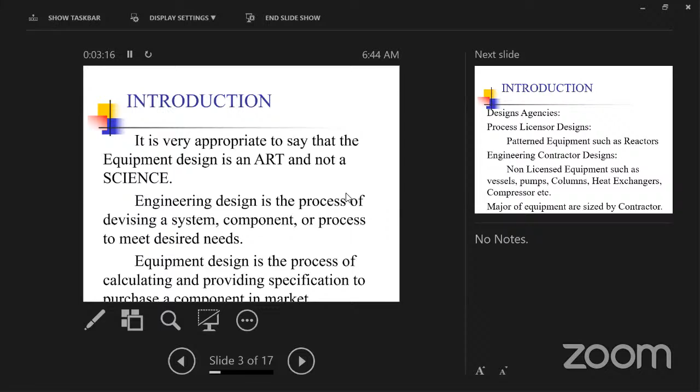Normally equipment designs are done by three agencies. One is the process licensor - companies like UOP and Axens, they are big shots. They design the process scheme. If we read our case studies, we have many processes to produce ammonia, and many processes to produce other chemicals. So they are the licensors.

They take care of patented designs such as reactors. They have a pilot plant, they do pilot tests, and they have proprietary catalysts. So these equipments, only the licensor can design. If we are a process engineer working with the licensor, yes, we can do a reactor, and it's our guarantee. Most process engineering for such equipment is done by licensors, and they finalize the performance.

The engineering contractor designs non-licensed equipment, which is open art. We can do vessels, pumps, columns, heat exchangers, compressors - the majority of equipment is sized by contractors. The licensor only does the proprietary items.

Other designs are vendor-supplied items, such as distillation column trays and tray arrangements - how many bubble caps we need - these are all done by column tray vendors, not by us. Other auxiliary systems like pump seals, compressor seals, ejectors, and steam traps are also vendor-supplied items which we cannot do, and we don't want to do either - these are all proprietary auxiliary items.

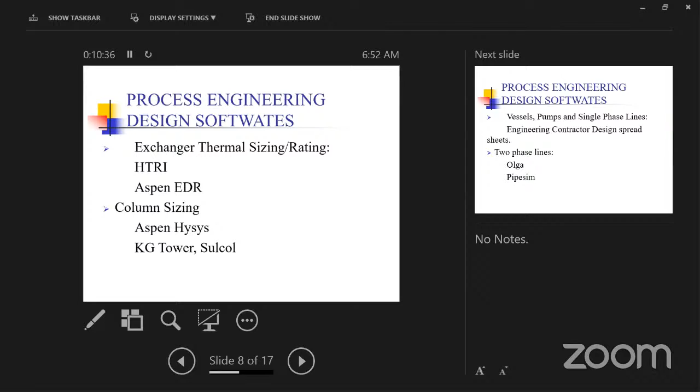Other major equipments are vessels, pumps, and we need to do single phase line sizing. These line sizes are mostly done by engineering contractors using design spreadsheets. Every engineering contractor has design spreadsheets, it's Excel, it's patented Excels. People use it and we can size it, no problem.

In a process plant, the costly items are reactor, columns, heat exchangers, vessels, pumps, then lines. So people will focus on lines. If you are able to reduce the line size, then we are providing an economical plant. So people give importance to the line sizes also.

And very interesting, we have two-phase lines. It's a really nice field. There are engineers called flow assurance engineers, you would have heard somewhere. Flow assurance engineering is a hi-fi job and hi-fi nature also. We can predict how a single phase will behave, but it's not easy to predict how the two phase will behave, that too in kilometers of pipeline.

The recent project worldwide speaking is the China project. They were going to make some pipeline projects between Europe to China, Russia to China, Arctic continent to China. So these pipelines are very important compared to vessels. When we make a 30-inch pipeline for a kilometer, it will be bigger than a process vessel. And the problem is these pipelines will cross domestic areas, commercial areas, forests, rivers. So when all these territories are involved, it's a very nice design to get into.

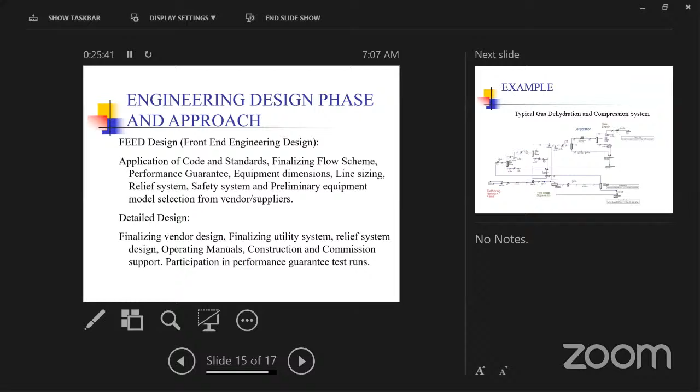I will take one typical gas dehydration and compression system as an example. I will take you to one of the very good software, HYSYS. I think St. Peter's has some HYSYS software. I recommend you people go and get practiced and write in your resume that you are familiarized with HYSYS.

So this is one of the very good, nice software you are seeing here. I'm having the latest version here. So this is one of the scheme.

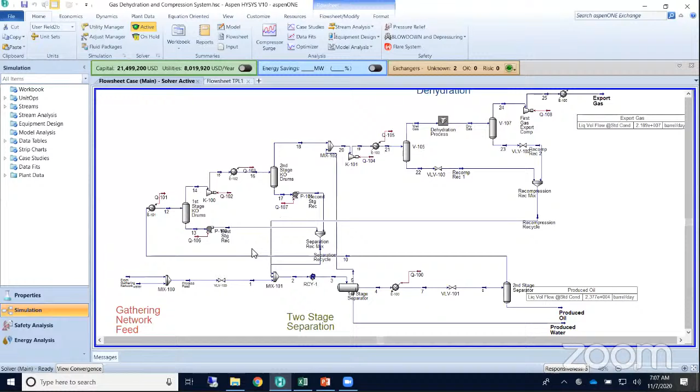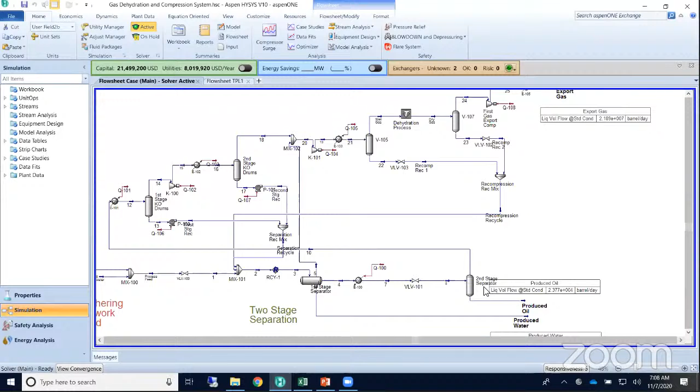So we have a gas production from the gathering. Before that, we will have a lot of wells, pipelines, and it comes to our process plant. This is a process plant, one of the gas compression and dehydration. I'm trying to fit here. So the upstream is another facility where there are wells and kilometers of pipeline. This is a process plant.

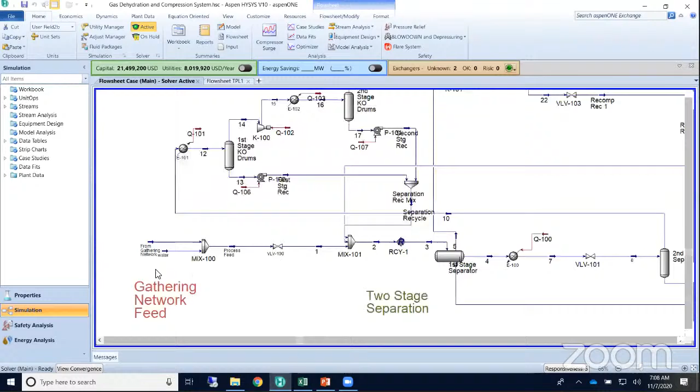Here we are gathering all the production fluids. I can say it's a production, it will have water, I can show you. So this is the stream. In this we have a vapor, we have a liquid, and we have aqueous phase, water. So when we do chemical engineering, we may have these three fluids.

How do we know the density of the mixed fluid? How do we know the viscosity of the mixed fluid? This software has a full backup and data. These are reliable softwares. If we do design in this one and implement, it will perform. It has pilot plant data also.

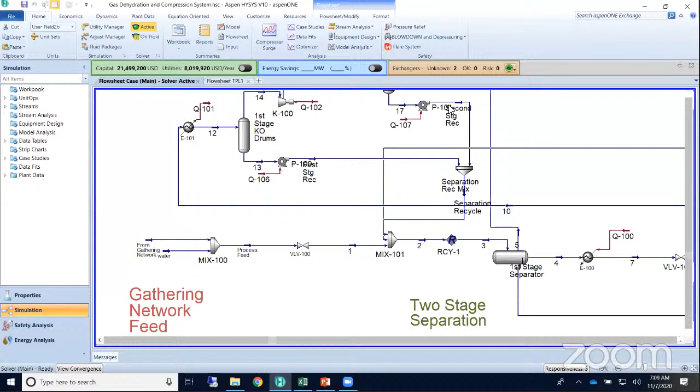Maybe I can give some introduction about this software. So this is a simulation and modeling software. We can simulate any fluid here, but this software has some limitations.

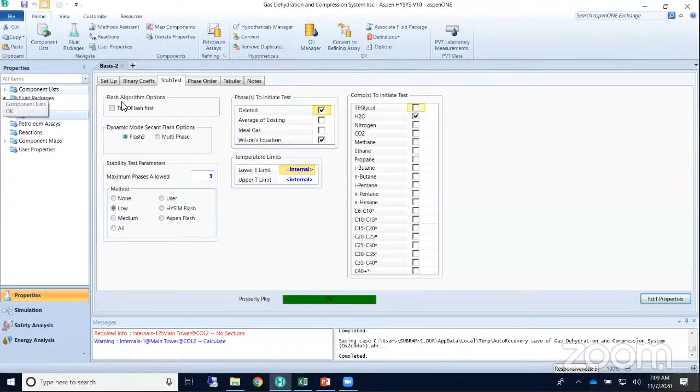Okay, I will start from the first. Whenever we start some equipment design, this software we start with HYSYS. We need to make a process scheme, that is called process flow diagram, and make heat and material balance of the total production plant.

I will open you one. So in this case, I want to start a plant modeling. I will open a new one. Okay, so once I start here, this is a new environment.

First, simply I will take some water. I wanted to boil it. How much heat I need to provide, I need to calculate. When we do by theory, it may take an hour, but when we do it with this software, it can happen in minutes. I will tell you.

Once we open, it will ask what is the chemical component we have. If you see here, from methane, all chemicals are here, with the properties. It has a full set of properties.

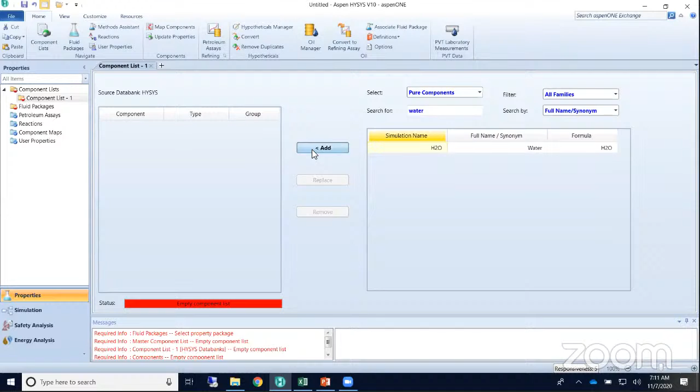Okay, let me select an easier one, water. Then it will ask for the thermodynamics we use. You can appreciate what the software is doing here. You see, we have packages. We say Peng-Robinson, which we study in college. SRK. All the equations are inbuilt here.

Some equations are not in the software. As I say, this software is not very good for electrolytes, but it will still do it. You see, glycol is another electrolyte, but we don't choose this in the software. We have a specific software for that.

So again, now I have chosen water. For water, Peng-Robinson is not a good tool. We need to have a steam package. So here there is a steam calculation package. If I mistakenly select this one...

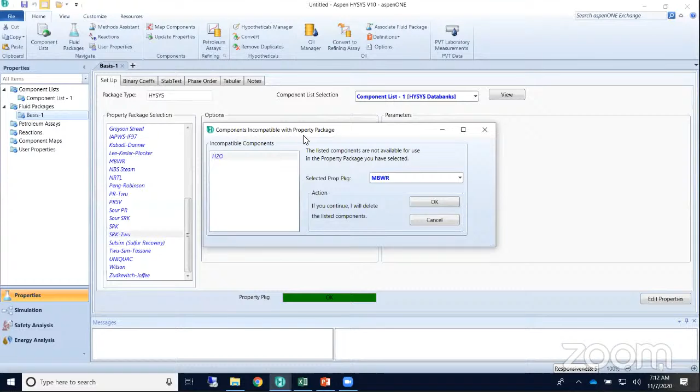Okay, so these are compatible, so it is saying green. But if I say something wrong, yeah, this is incompatible. So this software will direct you if you do a very big blunder. So I can choose ASME Steam here.

Then I go to simulation. Now I have chosen component and thermodynamic package. Again, if ASME Steam I have chosen, it is not asking any properties. But if I select Peng-Robinson, it will ask again, what enthalpy equation I have to use, what density equation I have to use, what modified critical pressure, critical temperature estimate method, and what viscosity estimation method.

And what method to estimate the thermal conductivity? This thermal conductivity plays a role in heat exchanger sizing. And what is the surface tension method? Surface tension plays a significant role in separation.

Okay, so this area is really, if somebody is good or wants to learn thermodynamics, practice this software. This is full of equations. I have not explored much because we use oil and gas chemicals. Sometimes when we go to fertilizer, they have very recently updated packages for ammonia. It behaves differently when compared to other oil and gas chemicals.

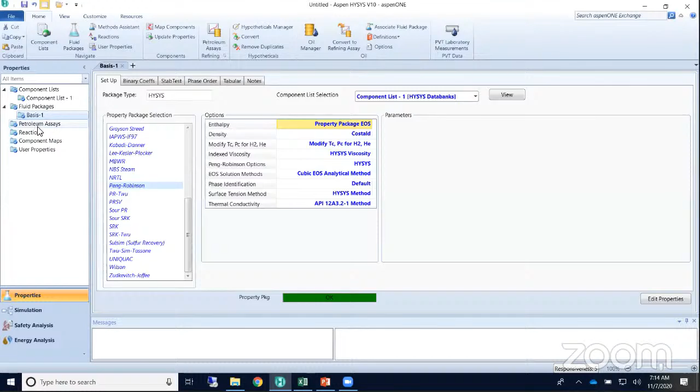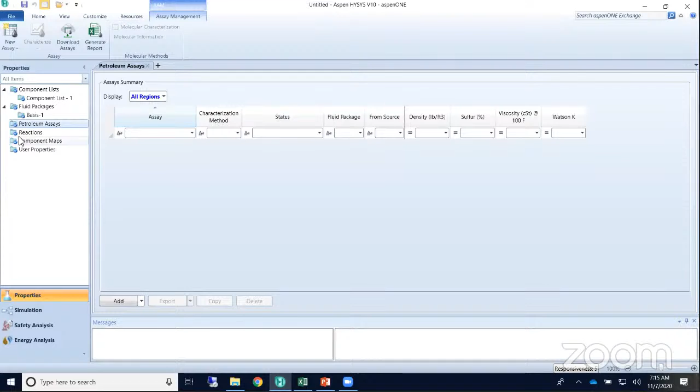When we go to crude oil, I don't want to cover it, it's a big topic. Crude oil is not a single component, it's an array. Based on the boiling point, the composition varies. We can model crude oil here, but I'm not covering it. If you go through here, you would have read the Watson K factor in theory books. It has significance and the provisions are here. The software covers all of this.

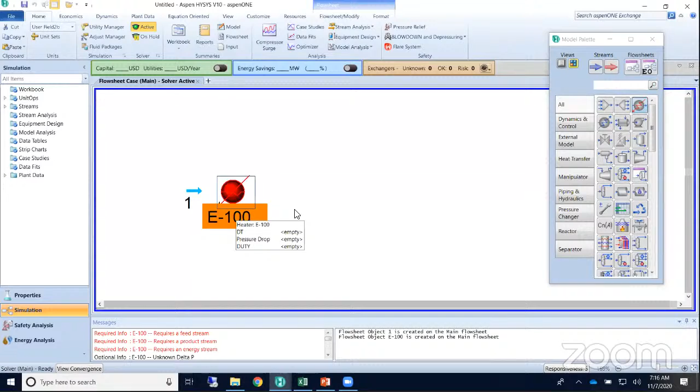These are some points on the software. When we go into a simulation, our modeling environment has started. So I want to heat up the water and make 1% boiling. This is water and I want to heat it. These are the software navigations you can learn by referring to tutorials.

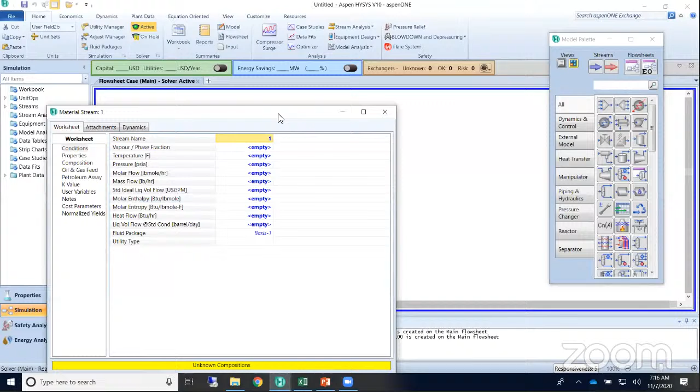You can check in Google. I'm just giving an eye-opening on this software. Once you open this, it will ask - the software doesn't know what this is, they have to tell it. This is composition. Here it's water, so I give mole fraction 1.

If you have a real composition of oil or water, we can provide it. Then it asks for the initial conditions we need to provide - what is the temperature here, what is the pressure here. So I give 60 degrees.

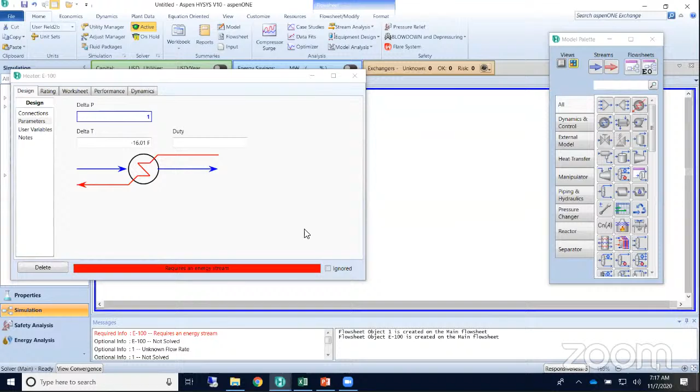So in the outlet, I need to have 10% vaporization. And pressure loss - this exchanger is a mechanical component which will create a pressure loss, so I'm giving 1 PSI. I think this needs an energy heating stream also.

Now we need to define what the flow is. The software needs the initial conditions, so we have provided it's water and it's 140-degree hot water. In order to saturate water, we need to provide a vapor fraction, so then we will give 1000 kg.

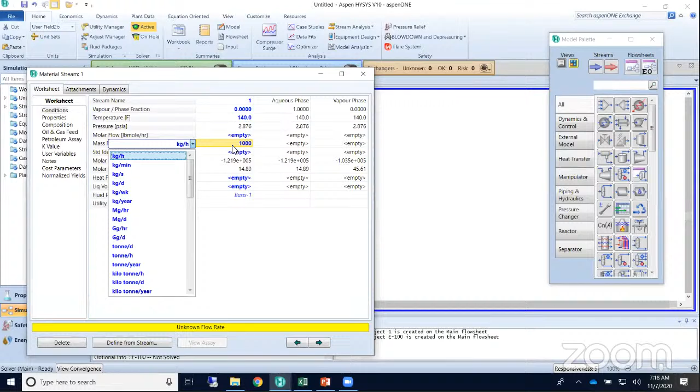And this software has all units. If you read this now, it has full properties - we don't need to go to a Mollier chart. It has full properties. The water molecular weight we know. Now what is the density of the component? What is the volumetric flow? What is the viscosity?

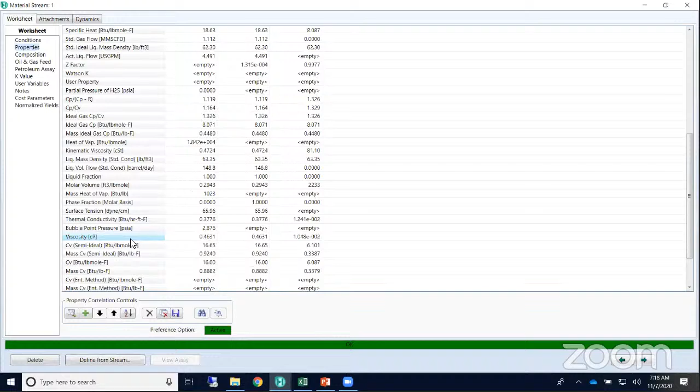Full nature - this is the full chemical and physical property of a stream, so we can get it from here. No need to go anywhere, don't need to check anything in Perry's or a Mollier chart. Simpler, we can get it. Even for water, we'd normally need to go to a Mollier chart, refer to graphs or tables. Here, nothing - it will give a straight away answer. Whenever we change something, it gives a straight away answer.

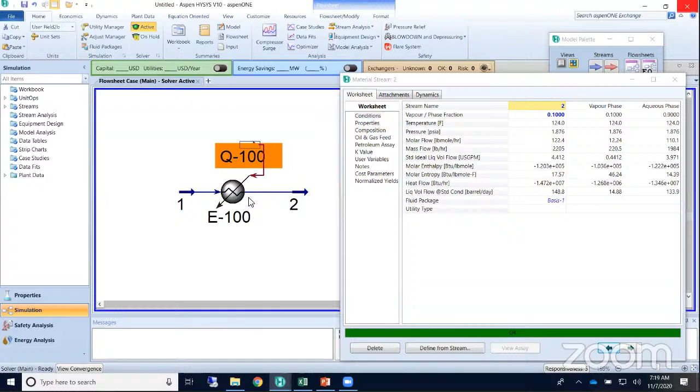And now it has estimated what the duty is - this is the duty of the heat exchanger. To vaporize 0.1 vapor fraction of water, I need this much kilowatts. We can change the unit also, so we can represent it as BTU. Normally MMBTU will be used to quantify the exchanger - 0.2 million BTU power.

So these are some examples I'm giving on this software. The software has many modules - we can do energy analysis, we can do safety analysis, we can do dynamics here.

We have blowdown and depressurization. This is one of the very good engineering applications where you can apply isobaric, isochoric processes. Depressurization is one of the isochoric processes - the volume of the process remains the same, but we change the pressure from high pressure to flare pressure. So this is a very good tool.

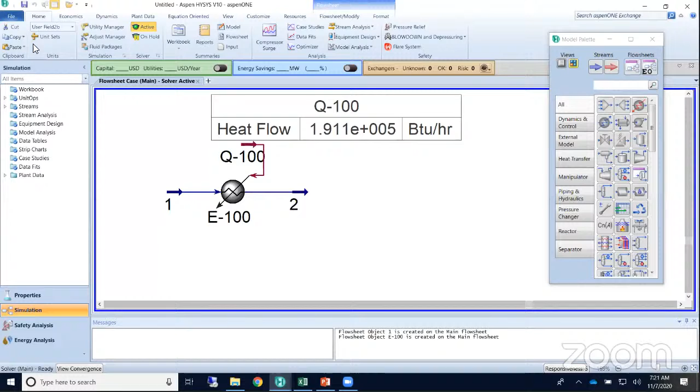But I recommend you guys learn how to model a smaller stream first - how to open this, how to set up the simulation environment. Then you can build complex processes. This is about this HYSYS software. I'll go to our simulation.

So in this case, we have made some set of process scheme. We need to size now the major equipments. First they do a compressor - this is a long lead item. Columns they do, then vessels, then line size, then pump - like this it will get progressed. Heat exchanger also they will do it along with the vessels. So the scheme is finalized here.

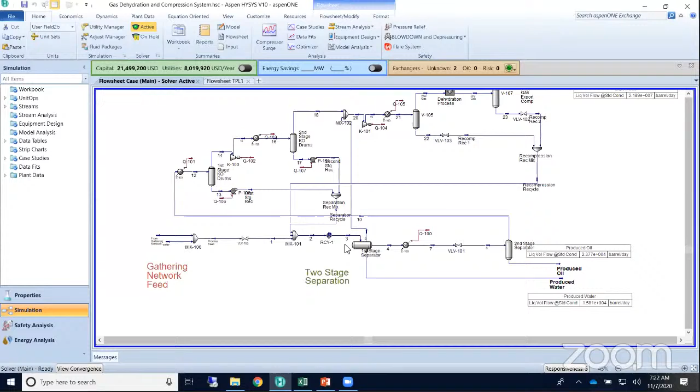I don't want to go into the simulation. It's another big topic - modeling and making a conceptual design, whether I need a compressor or not, whether I need a heat exchanger or not, whether I need a vessel or not. These are all again conceptual. I would like to cover only a few equipment sizing.

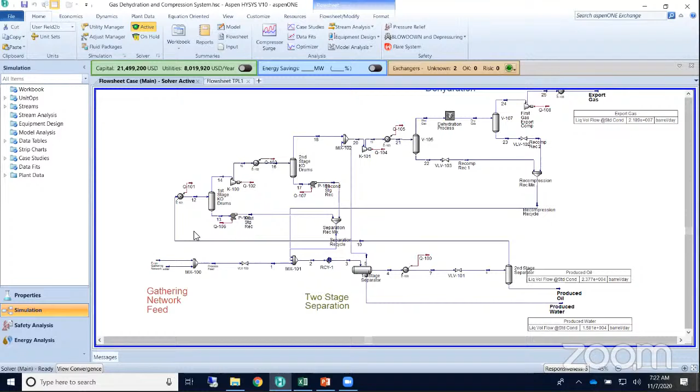Okay, so maybe we will be running out of time, but I will cover some equipments. Let's start with the line size.

So I want to size what is the line size. There is an equation, Darcy's equation - it's universal, it's not going to change. Instead of going into Excel, we can do it here. There is a pipeline segment - do this one.

So I want to size what will be the pipe size for the process feed stream, and this is a two-phase stream.

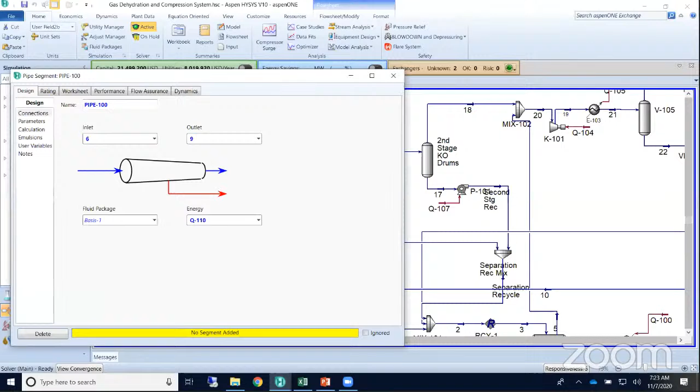So from the plot plan - a drawing in which we see where the equipments are located and what will be the relative elevations and relative locations - I assume this pipe segment between the inlet, from this inlet to this valve, we have a pressure loss. From this one to this, I find it's 100 meters. So I installed a pipe segment here. I go to rating and add a segment. This is a pipe, equivalent length is 100 meters. And then elevation change, I don't provide now.

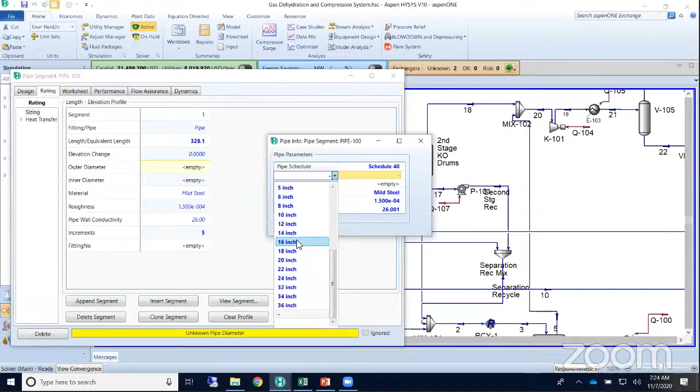Okay, so in preliminary sizing we need to select what will be the line size. We can, by engineering judgment, know this much flow is going, so it could be a size like that. So we select some 20 or 16 inch, and it will ask whether the heat transfer is in the exchange in the pipe or not. Normally the process plant pipes are insulated, here no insulation.

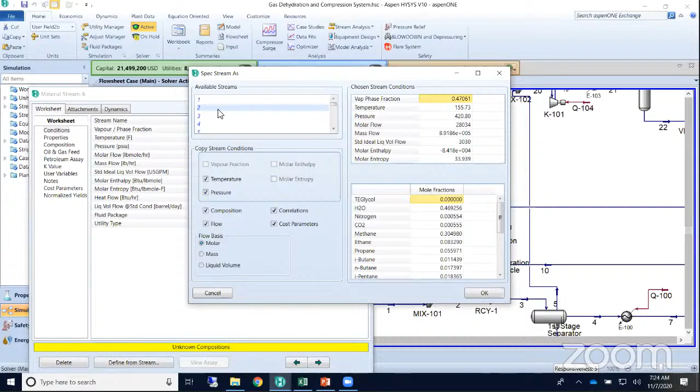Let us give this stream - we will copy this stream to 6. Open this, go to process feed. It's done, now the line size is done. Whenever we see blue and this gray, it's done, otherwise it will show red. So let us see what size we got here. So we have given a 16-inch line, and then it's OD - ID will be 15-inch. We are seeing here, okay.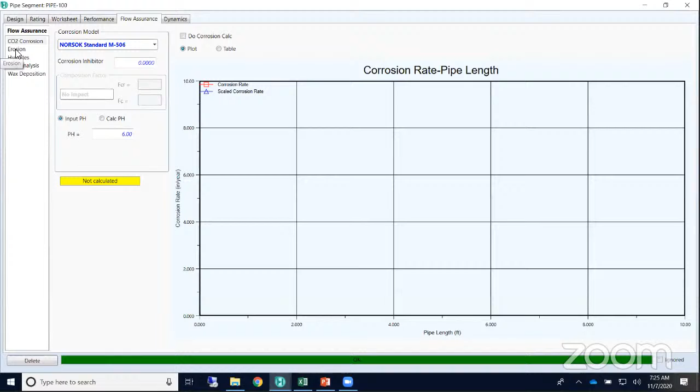Again, this has a provision for flow assurance - we can verify is there any corrosion, erosion, hydrates. I think you read the two-phase for slug also. Is there any wax deposit? Everything it will find. Before going, I want to show the results here.

I want to see velocity. Normally we use velocity, so liquid velocity we will select. Each segment we can find - let's make it this one. Okay, inlet velocity, vapor velocity, pressure loss.

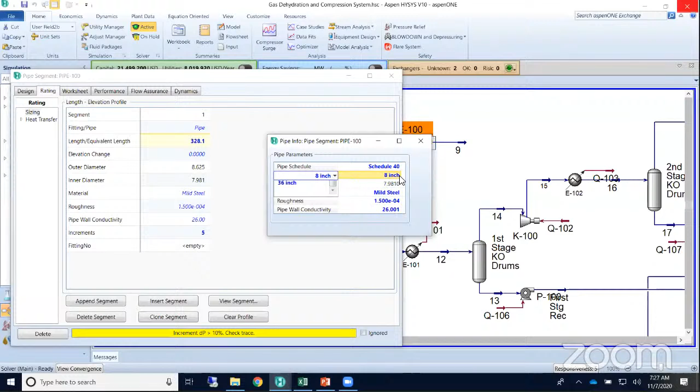Okay, this is fine. In fact 16 inch is very big for this - the velocity is very low and pressure loss is not much, so we can reduce this one. Yeah, again the pressure loss is a little big, so we need to increase. It's an iterative process, okay.

So the inlet vapor velocity is 87 feet, is fine. Liquid velocity 5 is fine. We have a set of rules here - maybe I can show some.

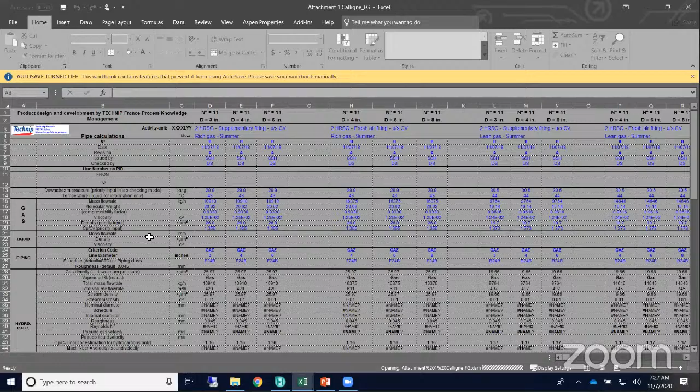So these are the criterias. Okay, we have to select - is it a gas? Yes. Then is it compressor suction? Or again gas is having a general gas, compressor discharge. So we need to filter it one by one. I say, for example, gas, and it's gas suction, compressor suction. Then what is the criteria I have? I don't have any criteria on pressure, inlet pressure, and I don't have any criteria on velocity, and I have only a criteria on rho v square. Rho v square is a loss - it's a noise kind of vibration, and we have a pressure loss. So per kilometer we should not lose 0.7.

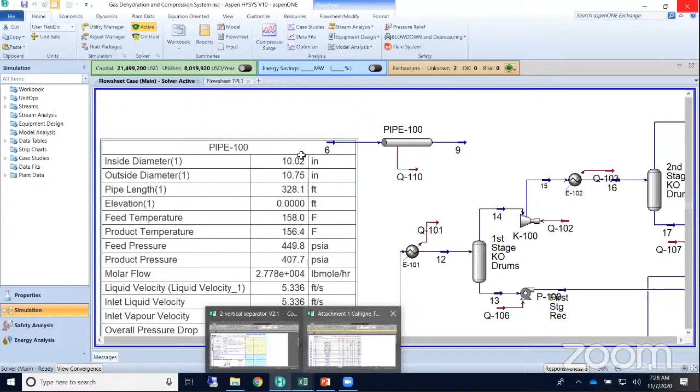So we will iterate the line sizes here to meet this requirement. As well as we have direct spreadsheets - this is a detailed engineering Excel. I don't want to go inside. If we copy the inlet and outlet conditions of these properties, we need to provide the line sizing properties - flow, molecular weight, compressibility, viscosity, density, and Cp by Cv. If we provide this, these are used in Darcy's equation. Same we need to provide here. Then it will say we can directly iterate here - 3 inch. This input again 3 inch, 4 inch, 6 inch.

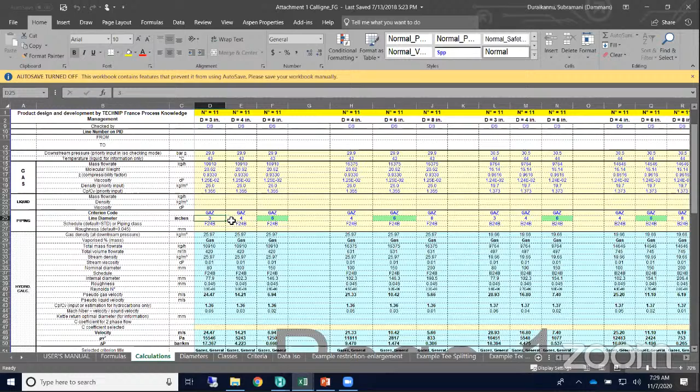We will verify for 3 sizes, and from that optimum we will select. The same I was doing here in HYSYS. So we need to meet this criteria. We will change the line size and then finalize it for this line, and then we can go to a drum.

The purpose of any drum is to separate vapor and liquid and hold the liquid for some time, to manage any process upset. For example, let's take this compressor. The compressor inlet knockout drum in our scheme is to separate any liquid from the vapor, and only vapor will be going to the compressor. If there is any liquid going to a compressor, it will damage it, so we need to remove the liquid.

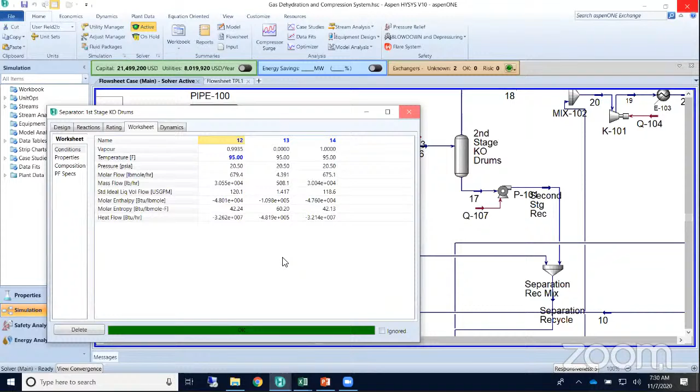I find small liquids are here, so we can size this one. The system is converged. In HYSYS itself there are methods, preliminary sizing we can do. So the system is converged, now I need to do a preliminary sizing. I open and put this as a vertical vessel, and the cylinder, the dish they are asking - normally it's hemispherical. So now if I say quick size, it has done it.

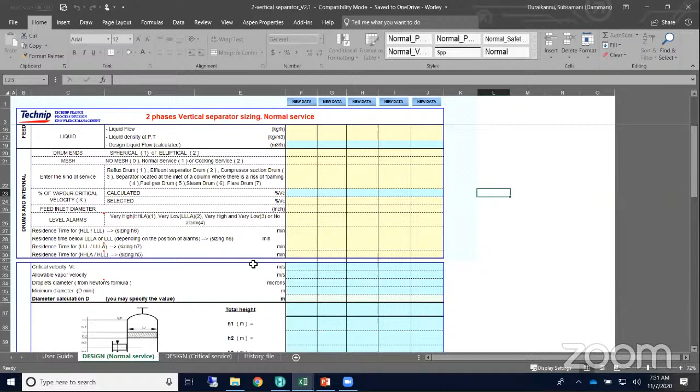But the formula behind this one, I will explain you in Excel. The formula behind this is Stokes law. Any vapor and liquid, if you put it into the vessel, by density the liquid is getting separated from the vapor. So there is a formula, that formula is Stokes law, so here it uses the Stokes law.

If you provide vapor flow and the density of the vapor and the density of the liquid and flow, these are the major inputs used in the Stokes law. It calculates the velocity at which the liquid can separate from the vapor. So when we provide some flow here, okay I'm providing something here - the vapor density I make 25, and liquid I make water 1000. Okay, then if you see here, it has calculated the critical velocity. There is a Stokes law, from the Stokes law it calculates.

Apart from this, for a process equipment, what is the dish we have? We have spherical, whether there is a mesh or not. If you read design books, there is a mesh to remove, to fine tune the vapor liquid separation. So I say here, I don't have any mesh. And what is the service of the fluid? These are all engineering design confidence and design practice. For me, it is a compressor knockout drum, so I will select 3.

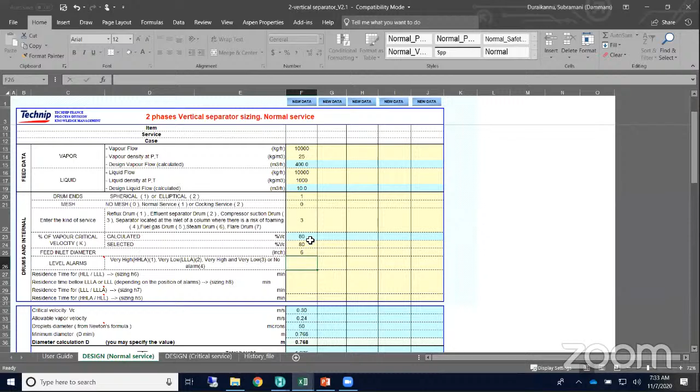Okay, this is the alarm. I don't know how many of you understand this - this is alarm, just I give 1 minute before, because these are the time allowance for handling any disturbance. Okay, I have a pump here. Somebody tripped this pump, or mechanically the pump has some interlocks, and the pump feels it's not in good condition. Then the interlock will start, saying okay this pump is not working, it has some trouble, it will go for shutdown. Once this closes, what will happen to the compressor? The operator will get an acknowledgement, get an alarm - something went wrong, somebody has to go and fix it. This is a 1 minute time. So these are the allowances we make, 1 minute, 3 minutes, it's based on the plant.

There are automatic plants out there - if we go offshore, it's automatic, they don't want to have manned platforms, so they will make more allowance for that. So this is the allowance, just knowledge, and we have a set of rules to select it. There is no big chemical engineering beyond this, there is only operating philosophy. Then once I give this, I have sized my vessel - see, it has calculated the minimum diameter, and it has calculated the allowances for each and every high level, and this is my column height.

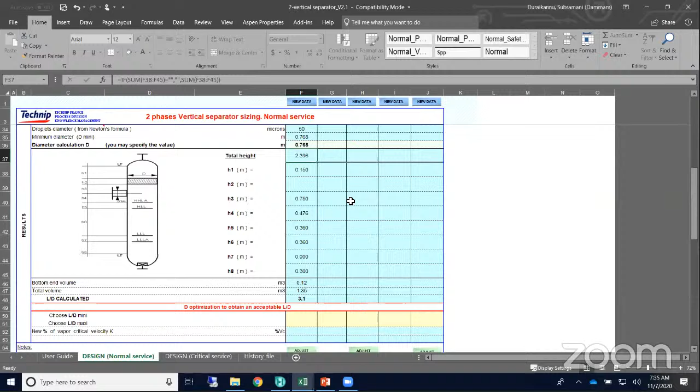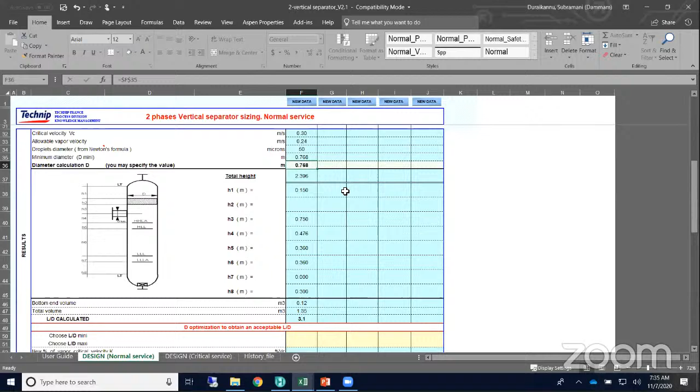Vessel height is 2.4 meters, and the diameter is minimum 0.8. We need to round off 0.8, but engineering designers will make it bigger by providing an over design factor. We need to provide here, we will add the margins here.

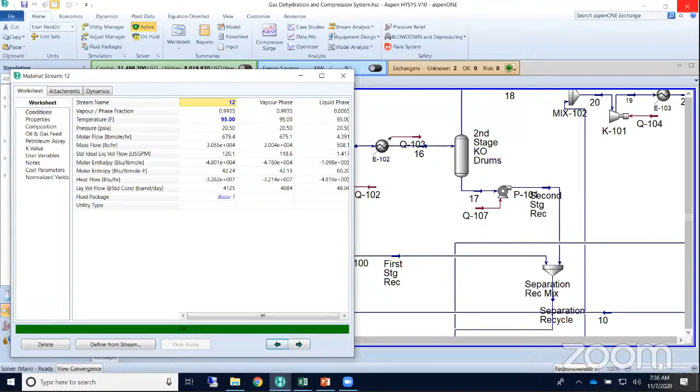Instead of giving 1000 from the HMB, we will take the flow and make it simpler. Even if I copy these inlet properties, I have given some rough values, but in reality we can provide real values too. These are the flows - mass flows, vapor flow, liquid flow - and the property we can get is only the density, mass densities.

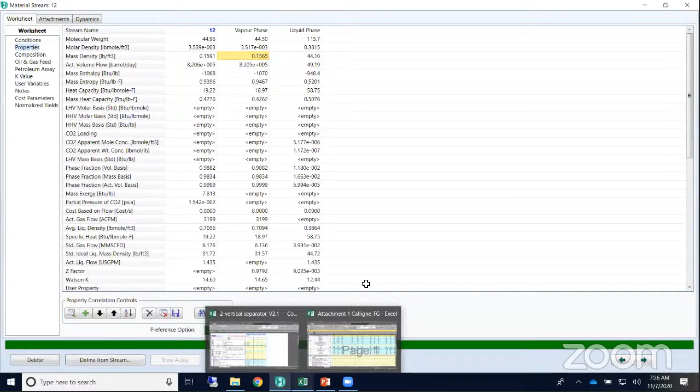Here my Excel and the HYSYS units are different, so I don't want to touch that. So I have given rough values. This is for a vessel.

And the beautiful process engineering equipment is a column. I just want to cover one column. And for the pumps, it's very simple from the software. Now the pump suction pressure is there, discharge pressure is here.

Once we converge this, if you take a knockout drum pump discharge, so the inlet condition is this. Pressure will be 20.50, but we will make some allowance for piping losses since there will be some pipe between these. So we'll make some assumption when we make a purchase specification.

And discharge pressure is there. If you have any control valves, all the fittings we need to add, then we will get the discharge pressure. Pumps are simpler, but it needs more detailed hydraulics.

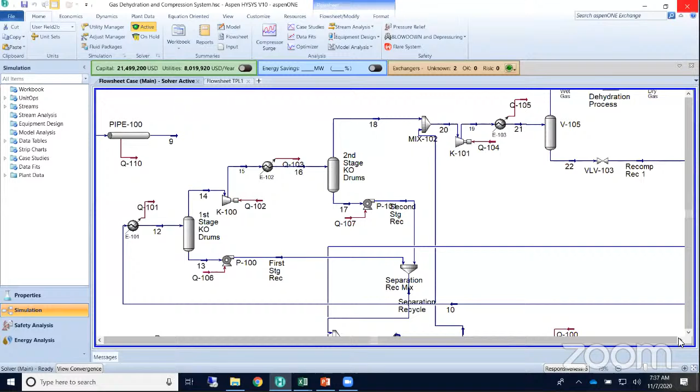During initial design we don't do this, but during detailed design they will add a lot of piping components. They do a dedicated Excel. We will appoint some juniors - normally hydraulics are done by juniors. They will be doing hydraulics because it needs full effort and follow up of data.

So we will go to one column. How do we size it? We have a dehydration process here. We are going to remove water here. In this we have a dehydrator here and the regenerator here.

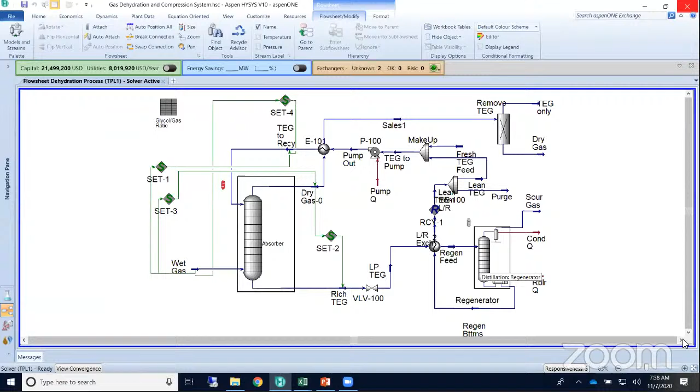I add regenerator here, which has a typical system. This is only an absorber, but it's a typical system. I would like to cover this one. Let's take this column - it gets converged.

Okay, now I need to size the column, and in effect we need to find how many trays we need.

Normally these services, absorber and regenerators using TEG, are typical because the nature of the TEG and the gas mostly remain same. We are going to remove water using the TEG, so water is fixed, TEG is fixed. So normally in industrial practice, how many trays will we have?

3 trays. These are all ideal trays, theoretical trays - I can say ideal stages, theoretical stages - but it will have some efficiency, 70%, 60%. These are all rules we need to follow, or from experience plants will say, okay for this water separation, this much purity of water removal, we are having a problem with this many trays. In future we need to increase the number of trays more.

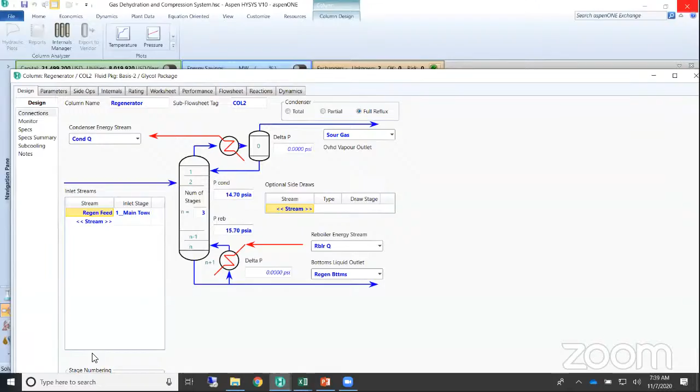So this is the column monitoring. Here when we converge, the reflux value is given here, and the condensate temperature, reboiler temperature. Reboiler temperature is fixed by the heating medium, and the condenser temperature is fixed by cooling medium. We cannot cool more than the coolant, we cannot heat more than the heating medium. So these two are fixed. Reflux ratio is set by the operating plant.

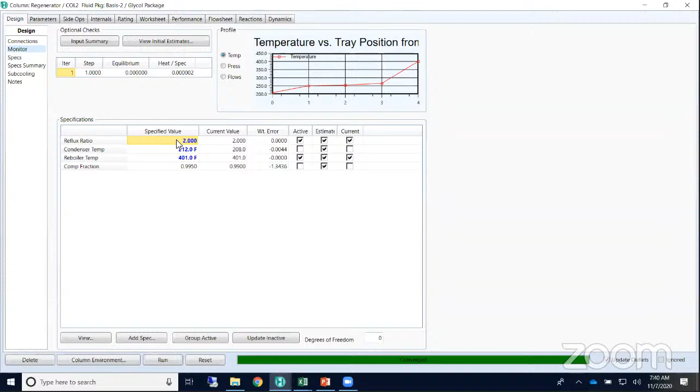So if you provide the parameters and the specs, we need to provide what is the key component - that is the separation we need to define here. And the operating pressures we need to define here. External reflux, we can give an estimate value. Then it will tell what is the minimum reflux required. We give iteration, but it will tell us how much - it's a guideline. Then we can make a main column.

So now the number of trays and reflux is determined by shortcut columns - use HYSYS shortcut columns. What we're doing in our college is finding an equilibrium curve, then number of stages based on purity. Here nothing is required - same thing, but it will calculate the number of trays by providing the key parameters.

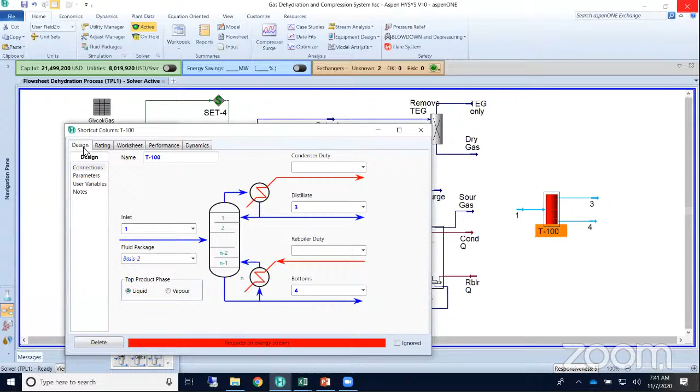We have to define what is the key component and what is our expectation and the performance. Once we do, it will calculate the equilibrium curves, number of stages.

If you see here, it is saying the minimum number of trays, actual number of trays, optimum feed stage, condenser temperature, reboiler temperature. And in a column we will have a rectifying section and stripping section. Everything it will tell you - what is the reboiler duty, what is the condenser duty, it will give.

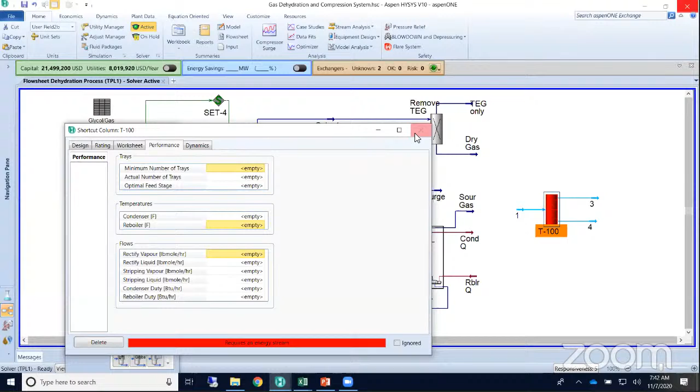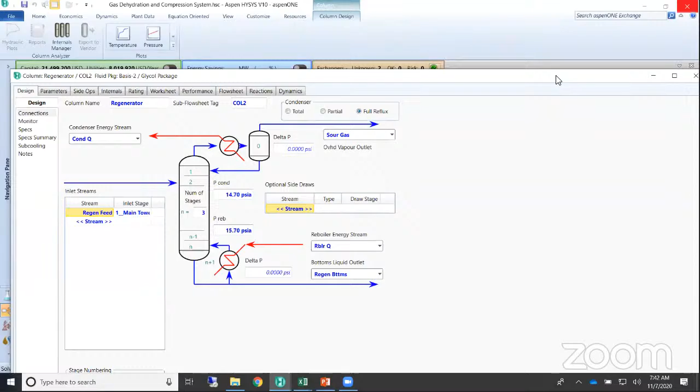So by using this you can find the number of stages. Then we need to size what could be the diameter of the column, what could be the height of the column.

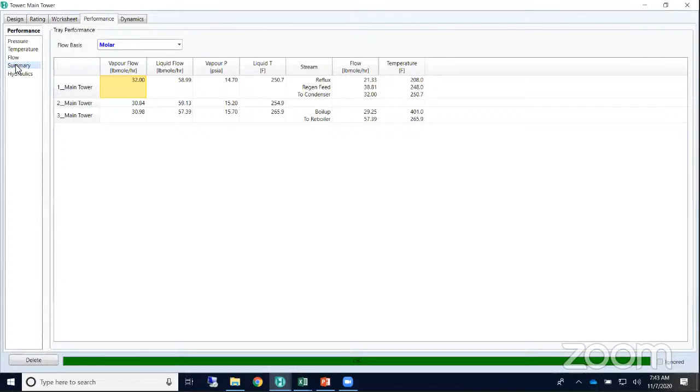So there is a column environment here. If you go inside - okay, I think they have fixed everything here, diameter also. Yep, this is 3-stage. So 3-stage, they have done it.

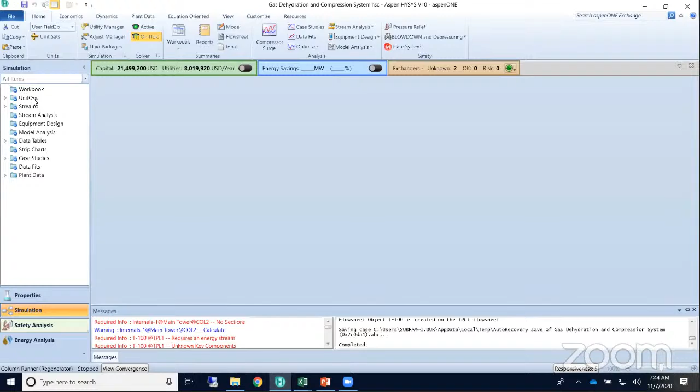Okay, so here, yeah, this is a column sizing now.

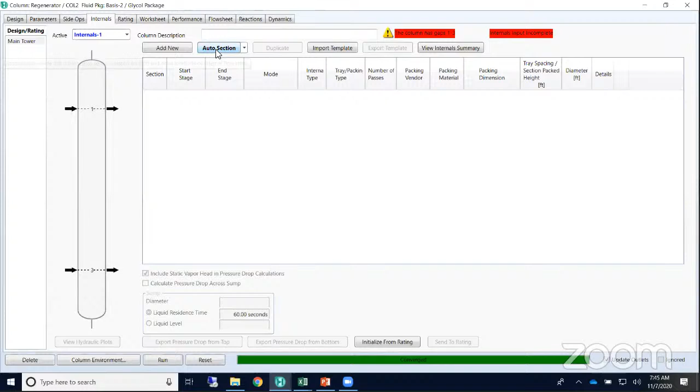So I have 3 stages only, theoretical stage. So I want to have sizing now. I say auto section, because you would have seen in process plants, the column bottom will be very big, top will be very small, because it has 2 sections. In this, we have only 1 section. When we give auto section, the software will tell us what the minimum section required will be. It is saying only 1 section, and the expected diameter will be 0.8 feet.

It's a very small column, in fact. I don't find it, so why it's like this. Let us see this. Maybe the criteria they have set is wrong.

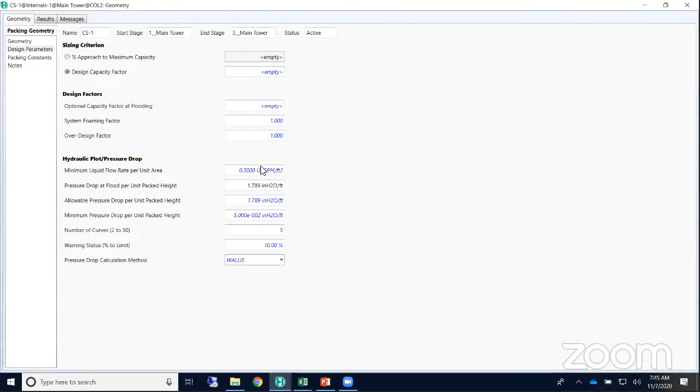So here again there is a system factor and the over design capacity. Those things they have not provided, in fact. If you provide here, we can find a column. You close this column, it's a packed column, little complex. Then you'll go to a tray column.

So here it's a tray column. It is having only 1 section, and it's a tray. We can change all the internals: bubble cap tray, sieve tray, or valve tray. If we go to valve tray, we have to tell the software what kind of valve we are choosing. So normally we do with generic bubble cap.

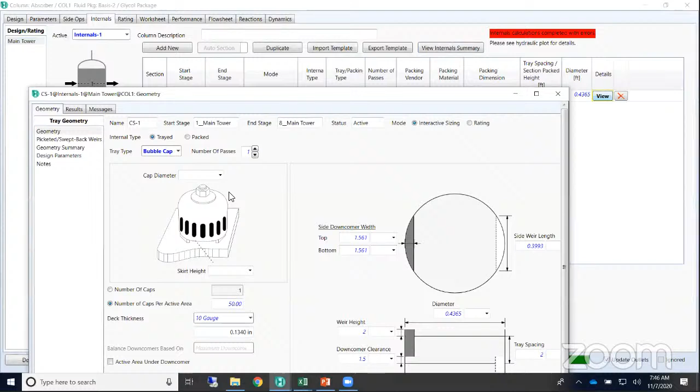Then we need to set the rules for the sizing. So this is the tray sizing environment. We can select what will be the tray type, number of passes.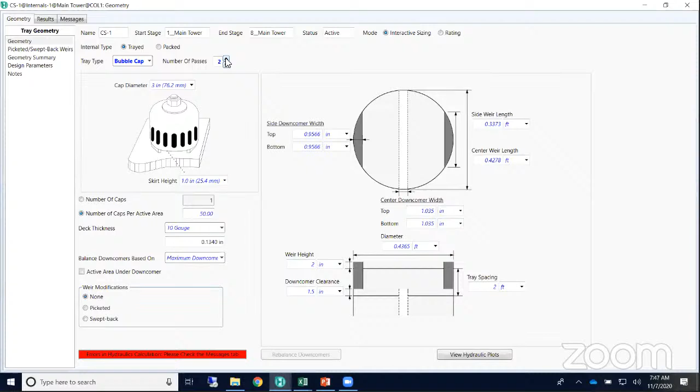You may be knowing, I hope, there is a number of passes on the column. This is a single pass. If we make it 2 pass, you see this one, the center down, the downcomers are in center. So it's like this. 3 pass is not there, 4 pass. 3 pass is there, but we don't use it. So even passes are good, so 4 passes here. So we can select this one.

And also the software will tell us how many passes are required. So we'll give conditions. These are the conditions we need to provide.

As I say, over design limit we need to provide. Its over design factor is 1. Normally 25, columns are designed to 125%. So system factor, foaming factor, I don't know whether these values are in the syllabus or not. This we need to use based on the nature of the chemical. Amines will foam during the separations, amines will foam. So we need to have a 0.8 here.

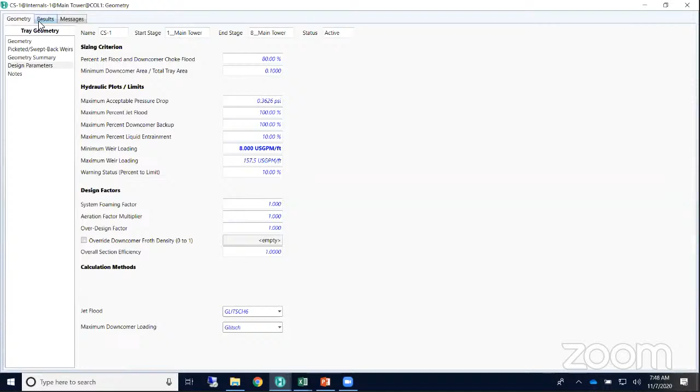These are again the project specifications we use. So once we give all this, then the results will come. Number of passes 1, tray spacing we provide, it's a standard, and section diameter, a height, 16 feet height.

0.4 feet is wrong here. Wrong, it's in half an inch, it's not half a feet. No, half a feet is not the correct one. And it will give an error.

What are the design errors we have? We need to handle. That's why this is, you see, this is less than the minimum diameter of 2 feet recommended for columns. Consider using a packed column. It is saying the column is very small. Consider, we need to troubleshoot one by one.

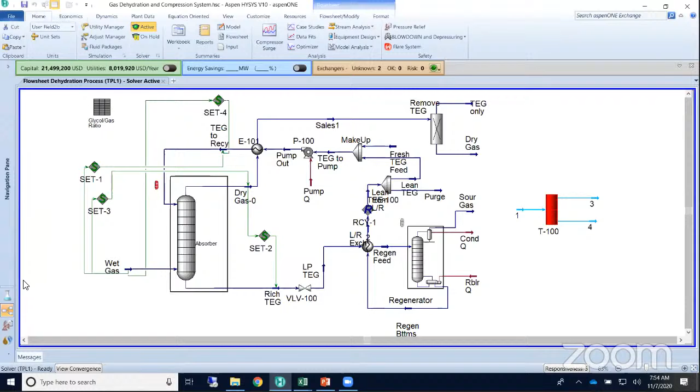They're asking again - can we use DWSIM software? Yeah, we can. DWSIM is for amines - it's amines, we can use that for amines. They call it TSWEET. It is for amine recovery, sulfur recovery, we can use that. And in HYSYS also, we have some packages supporting amines. We have it here.

Another question - do you have any idea about fluid flow software? Yeah, that is Olga. It's for pipelines, we can use Olga.

Next question - what documents and details do we get from the customer, and what do we need to give to the customer from a design engineer perspective? It's a very good question. If our client comes with a problem or a new idea, there are two options. One is a new idea or problem - there is an existing plant and it is not performing well, maybe in quality or quantity. Quantity means production is not up to the point, or they want to increase production. So they will come up with the problems, or they will say we have money, we are going to build up, and government is planning to increase - for example, last year we put up an ammonia urea plant because government is planning to increase urea production in India. So clients come and say we want to increase, please tell us what technology we can select, how much it will cost to put up this fertilizer plant, and when can we commission it, how long will it take.

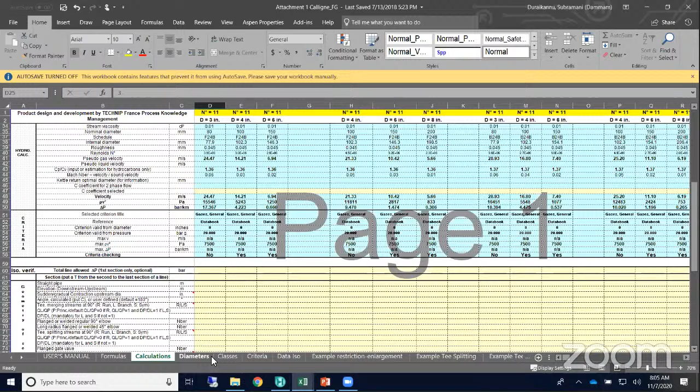Next question: is there any standard for line sizing? Yeah, we have Darcy's equations, and I will show you. Every company has their own criteria - it's a matter of whether you want a bigger pump or bigger line. So every company has their own standards, and we use industrial practice. For offshore lines, yes, we have API 14E. It applies for offshore and flow lines - there's a flow line called a flow line. They say it's not a pipe or a pipeline, it's a flow line. We have API 14E for that.

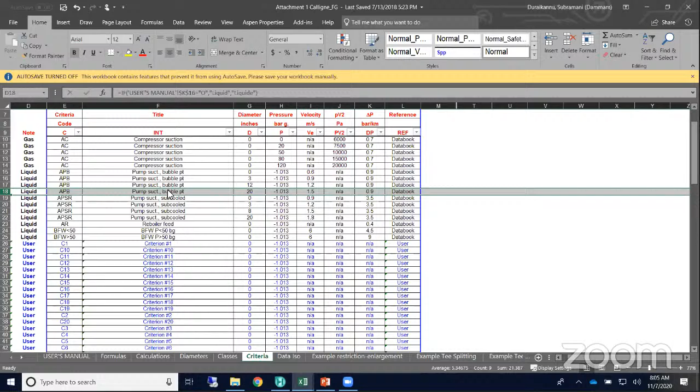On behalf of students: to get into process engineering, how should they prepare themselves when completing their final year? What topics should they concentrate on to prepare for a process engineer role or a design company?

First, understand how each and every equipment is operating, what it is doing, and how it is specified. Basically, design engineers do specification. Okay, I need a compressor - what will be the discharge pressure, what will be the suction pressure? When we go into the market, we need to purchase. So our view should always be by equipment - this equipment is doing this.

We need to calculate and specify this parameter or number, so we can size or get this. We need to think that way. And when we go on any site visit, we need to think by equipment.

Because the schemes are fixed at a high level, as a chemical engineer you cannot change or update any schemes or process schemes. But in process design, for equipment, we think - yeah, this column is doing this, and we need to size this much only, this is only to be generated. That's it. We need to do this, and get into a lot of site visits to see how the plants are operating, because once we know how the plants are operating, then we can do sizing.

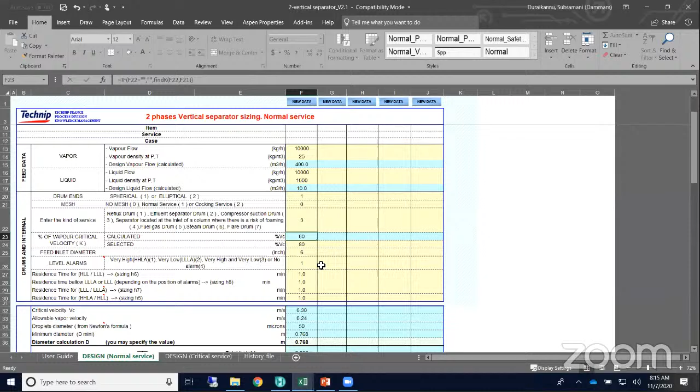Any other queries from your side? Participants, any other queries? When we use water as a feed for line sizing, which equation should we use to simulate that feed in a facility?

Yeah, it's steam. Here we have ASME steam. Steam, it's a Mollier chart. It's a set of rules set in the software to translate the Mollier chart. Steam table, normally we use steam table, right? That table is here, it's inbuilt.

Any other queries? Shall we close the session? Okay, EDR or HTRI, which is better one? Yeah, maybe for the last question continuation, I think. Okay, this is a very good question.

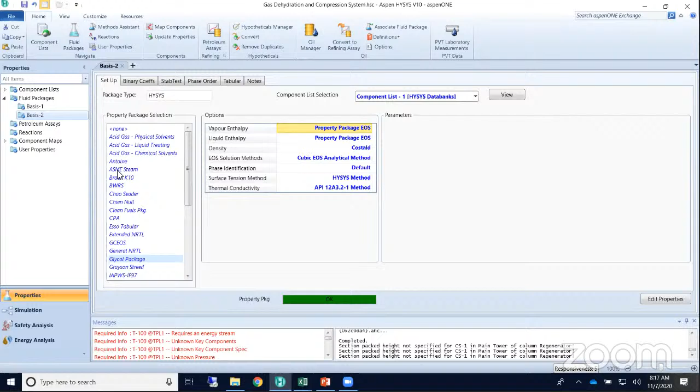In fact, EDR is from Aspen HYSYS. It's a recent tool, it gives high level sizing, but HTRI is a real tool. Before we construct any exchanger, it's better to run it in HTRI. EDR is for preliminary sizing, I can say. So we have many engineering design phases. We can do EDR at basic phase, but when we do front-end design, use HTRI.